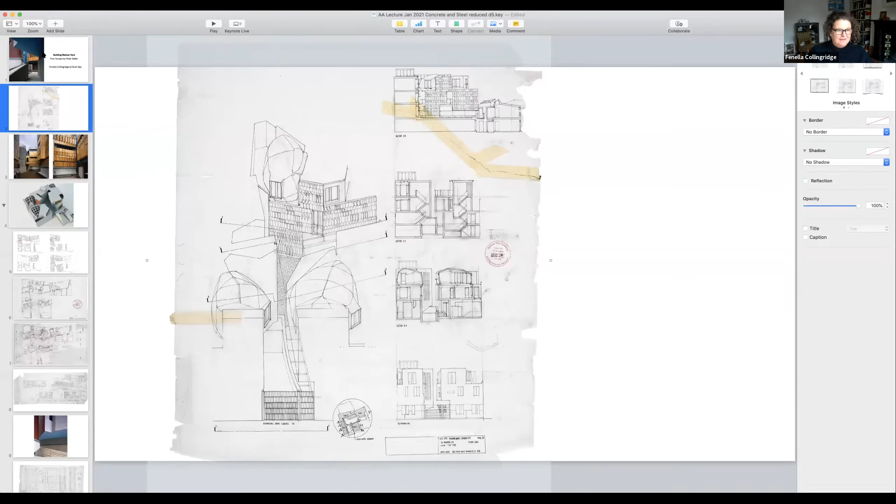As the builders make the building, no matter how deep the thinking that's gone into the drawings, you have to make continuous adjustments to relate the reality of matter back to the original idea - to strip back, tune and refine. This building is a bespoke building, there's a lot of material experimentation, and experimentation always involves risk. It's on a very tight site that gives very little room for error.

And the story we're about to show you is about what really mattered to us, how Peter, Daren and I worked together to realise the project.

It's really nice to be at the AA to talk about Walmer Yard, because I always think of it as an AA project. Peter Salter taught at the AA for years. The client was a student of his in his unit - that's Crispin Kelly - and I was in the year below him studying with Peter.

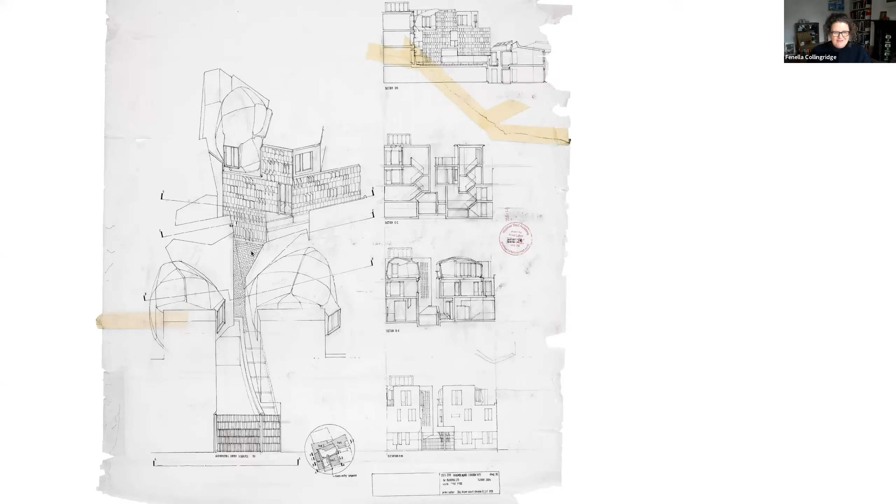It's a space that's about quietness, so the geometries break up the sound, the timber louvers are all adjustable and they give privacy. The grey render is an acoustic tunnel spray that you normally use in tunnels, and that absorbs a lot of sound.

The building's built of two skins of concrete up to the top of the benches, you can see, and then it continues as a single skin of concrete inside the rooms. So I think it's a project about interiority. Even this shared courtyard space, which faces south, is conceived of as a room with these massive benches. And on the ground, you can see end grain oak cobbles.

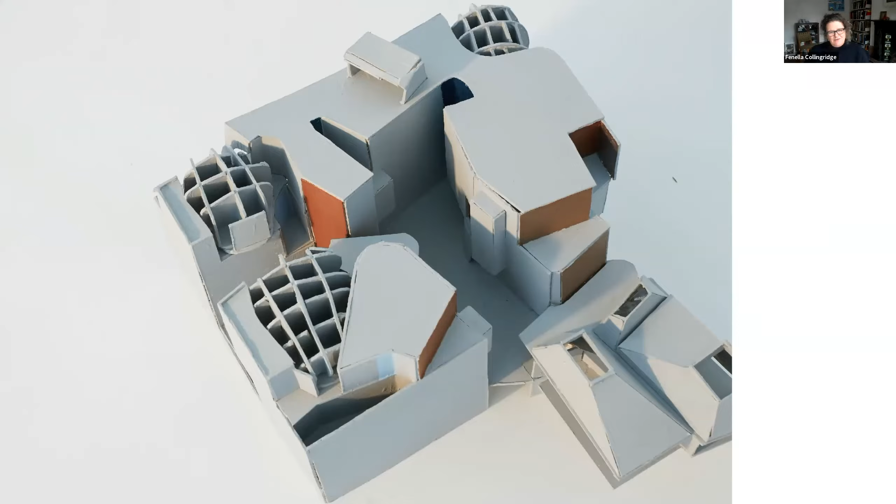So this is a very early model that I worked on with Anthony for the colours, but I'm showing it really so you can see that inner pocket of space, and also how the plan splits and cranks so that every room has more than one aspect of light. This is a full set of plans.

This is the ground floor, lower ground floor and ground floor. There's 4 houses. This is house 1. House 2 comes back to here along this party wall. House 3 runs along the back of the site, and house 4 is what we call the sunken house.

So that's the top floor, and then it's pressed down into the tabletop. And then this is the courtyard here. Car park level below, bedroom level, and the sitting room level.

But as the site's tight and the rooms are actually quite small and intimate, you can see that the circulation is an incredibly important part of the scheme.

There are 2 big cantilevers here and here that almost close the courtyard space off from the street, making it even more private. And these big lozenge staircase drums - I think of them as table legs, really. They're holding up the large transfer slab that's the courtyard.

The geometries look very complex and fluid, but there are very strict rules and patterns to them. Every room has at least one right angle, and around the courtyard, all of the walls are either parallel or perpendicular. It was essential to understand how those rules worked and maintain them not only in the drawings, but also in the project.

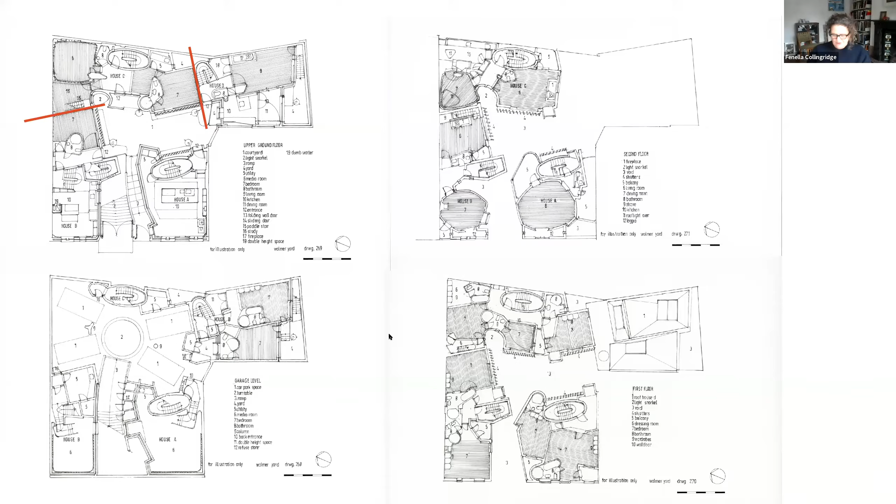This is an earlier hand-drawn plan of the ground floor. I think you can really see the twists.

So every time you enter a room, you walk around one of these steel bathroom pods through the shadow before you come to light. And as you walk up through the elliptical staircases, they give you a wider landing on the turn, so you're constantly being turned away almost before you enter a space. And that extends your feeling - it sort of extends the experience of the size of it somehow. That's a bit clumsily said, but it's true.

The concrete pieces are obviously structural and massive, and they're gentle in their geometry and in their surface treatment. They carry light and shadow. The dark steel bathroom pods are things that you always walk around before coming into a room, so you're constantly turning through shadow before coming back to a muted light.

And the two parts of the scheme we're going to talk about today are the concrete and the bathroom pods. Concrete was essential because of its thermal mass and its acoustic properties, but also because the casting process communicated the fluid geometries of the plan and the section.

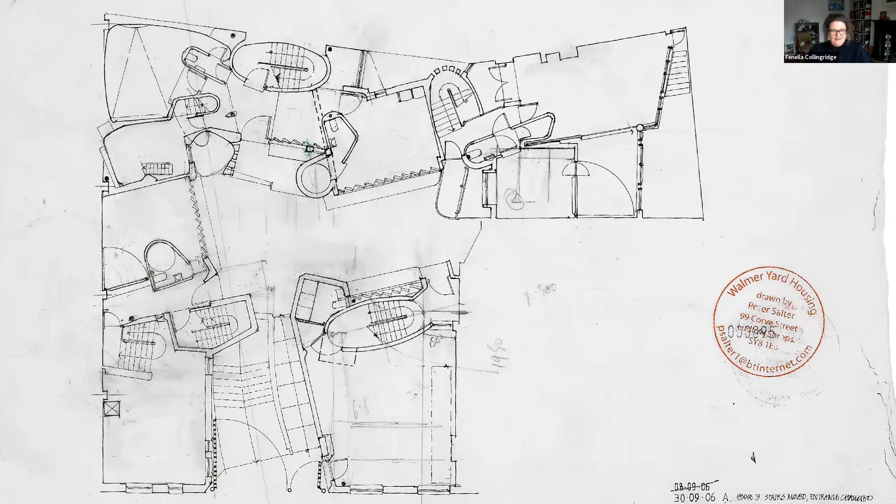I love this drawing because it was one of the first translations from hand drawing into CAD drawings. I think it's interesting how the design intention can so easily be lost or changed as you move from one process to another, from one set of definitions to another - and all the redlining, that's me and Peter correcting all the geometries that somehow got a bit flabby when taken into the CAD drawings.

I think it was hard work doing that in a drawing, but then imagine we had to do that on site as well. So it's that kind of trying to keep control of all of it, and keeping that rigour was a struggle throughout the project for all of us.

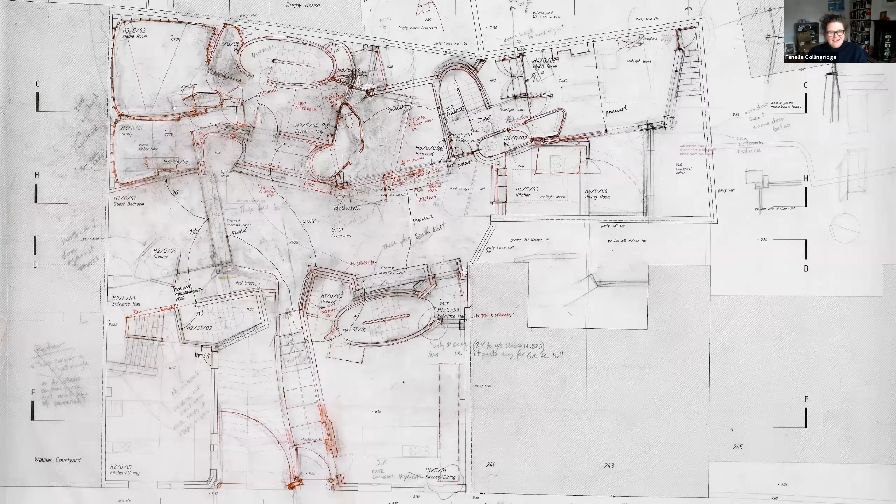The great thing about working with Daren was that from very early on, he really understood what mattered to us and how to translate that into construction. This is a drawing of the ramp, which Daren's going to talk a lot about making the shutters for. Peter knew a lot about concrete because he'd worked on the second arts building in Bath with the Smithsons.

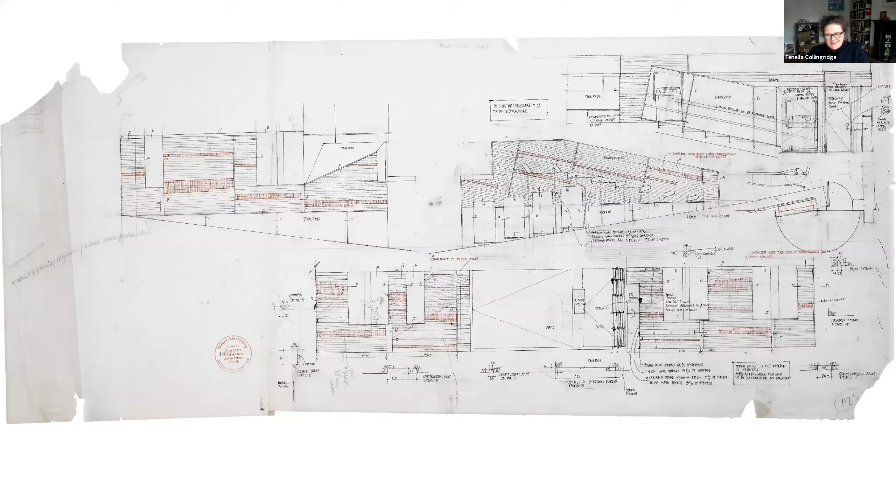So actually we sort of knew quite a lot about what we wanted to achieve. But even here, you can see that all the red patches were areas we were going to scabble. In the end, we just scabbled the pieces that hadn't quite worked - and so scabbling became a technique for us to repair concrete.

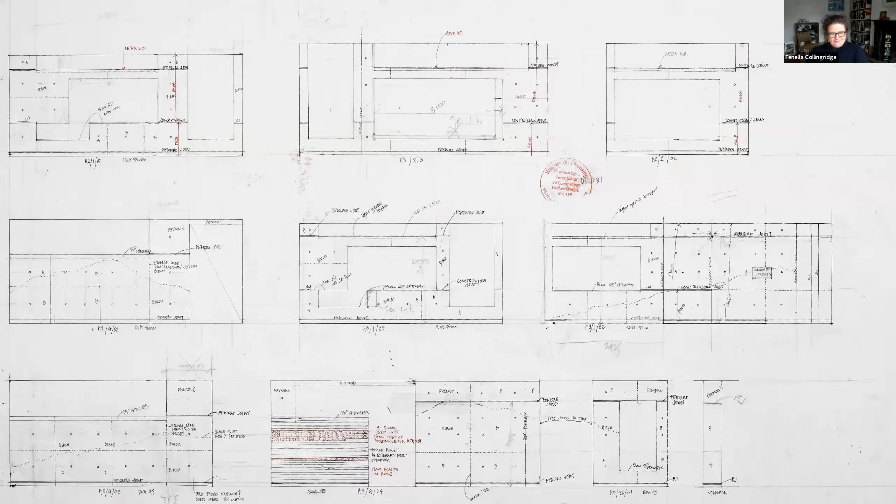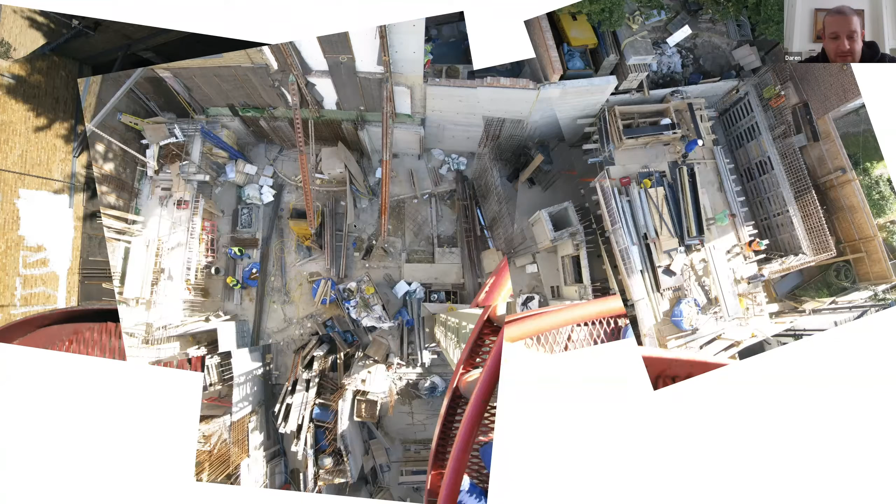Wanted it built. These weekly meetings helped form a great bond and friendship between us, and helped them realise our strengths and us have a good understanding of what they looked to achieve, both practically and aesthetically. I think the best results from these meetings were usually formed after the weekly pub lunch. Fenella was always the voice of reason in these meetings, unless there was a chance of using gold leaf anywhere. So, next slide.

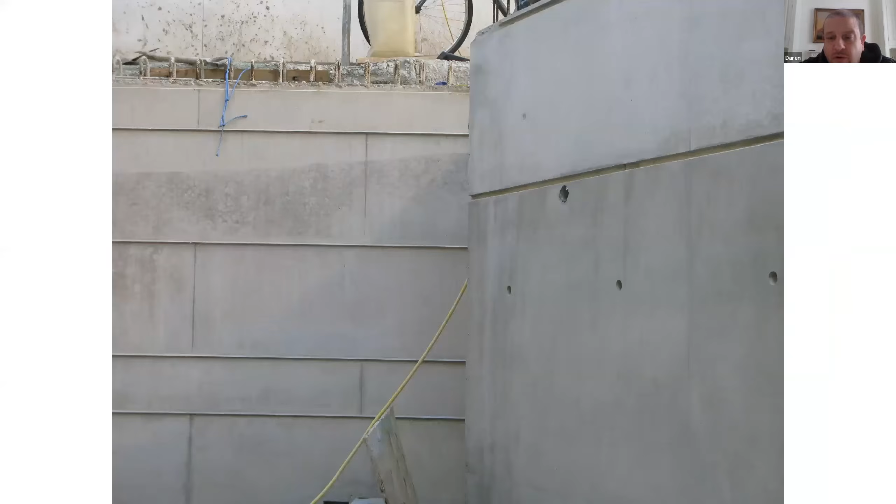During the process of work through the concrete package, it was agreed that we would produce sample panels for all the concrete finishes. Luckily, we had a space in London where we could build a sample room containing all the finishes to be used on site. So we were able to agree on the concrete mix, types of releasing agent, types of timber for the board mark concrete, and the striking times. There were 9 different concrete details to incorporate into the project.

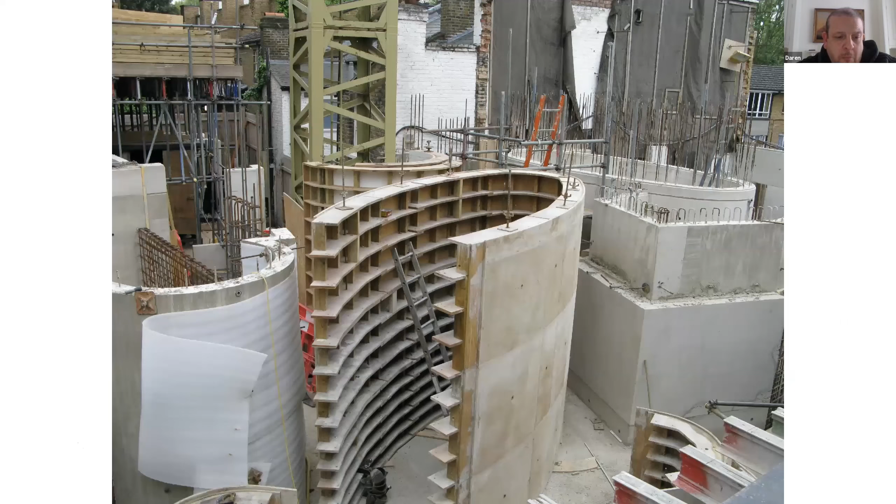This enabled them to be used on all 3 elliptical staircases. The shutters had no face fixings, as we did not want to see any nail or screw marks in any of the concrete, so everything was fixed from the rear. The design was made so that everything could be bolted together and easily stripped down by the site operatives. The shutters lasted nearly to the end of all 3 staircases, and we just had to reskin them for the final pour.

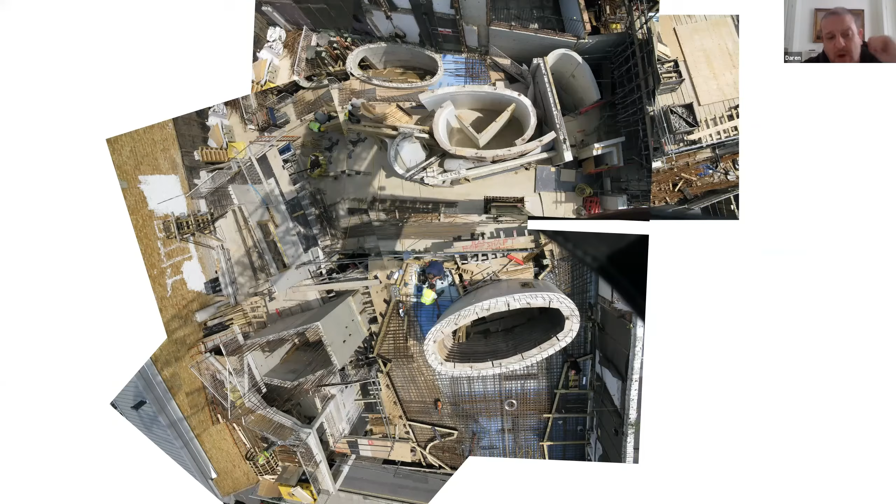As you can see from this photo again, the site had lots of issues, and the main issue was space. We had a crane situated in the centre of the courtyard, which moved the shutters to their required positions. To install in-situ concrete on any site, you realise very quickly that the shutters, push-pulls and braces take up a lot of room. And when the shutters are not in use, they have to be stored on site. It's very clear from this photo taken from the crane exactly how tight the site was for space, especially considering the nature of the works.

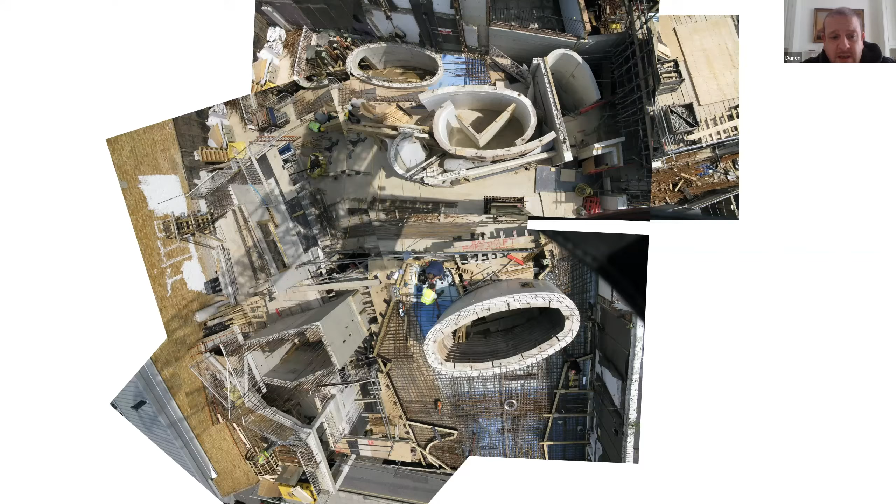The shutters for the staircase, when fully erected, were 4.8 metres high, 7 metres long and 4 metres wide. In lots of concrete projects, you can use the shutter for a pour, strike the shutter, and then move it to the next pour. In this project, we could only do that with the staircase shutters. Everything else had to be individually made for every single pour.

When the concrete lorry arrives on site, everything has to be ready to go, as we only have about an hour to unload each lorry. The concrete is poured from the lorry into either a concrete skip, which is transported to its place by the crane, or a concrete pump, and then poured at a steady pace into the shutter, while the concrete finisher uses a vibrator, removes all the air from the mixture, and pushes the concrete against the face of the shutter.

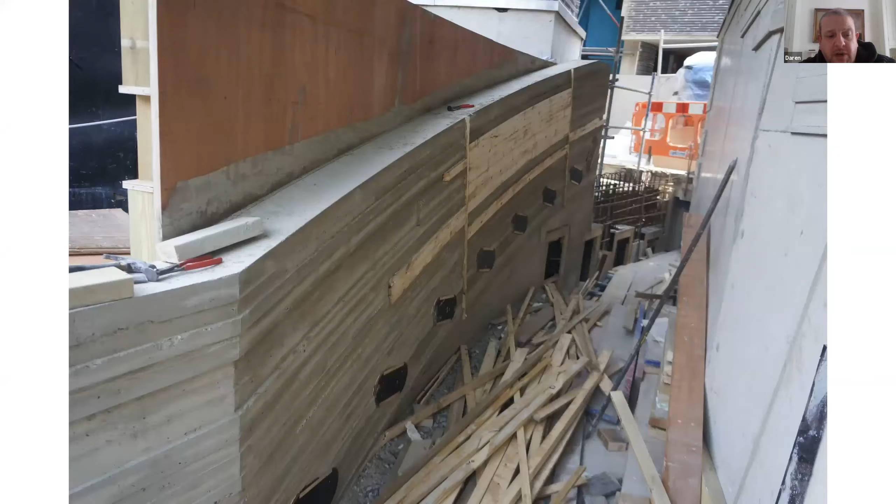This process was completed to the exact method and timing that we had specified, using findings from the test room. The majority of concrete pours on this project were completed using the skip method, as we had used this method on the test room. The concrete was placed and correctly vibrated.

Then we allowed the concrete to cure for a specific period, which was different for each pour. For instance, you see on this photo here, we actually let the board mark timber shrink back itself and fall off, rather than trying to take it off, because that just made too much damage to the shutter.

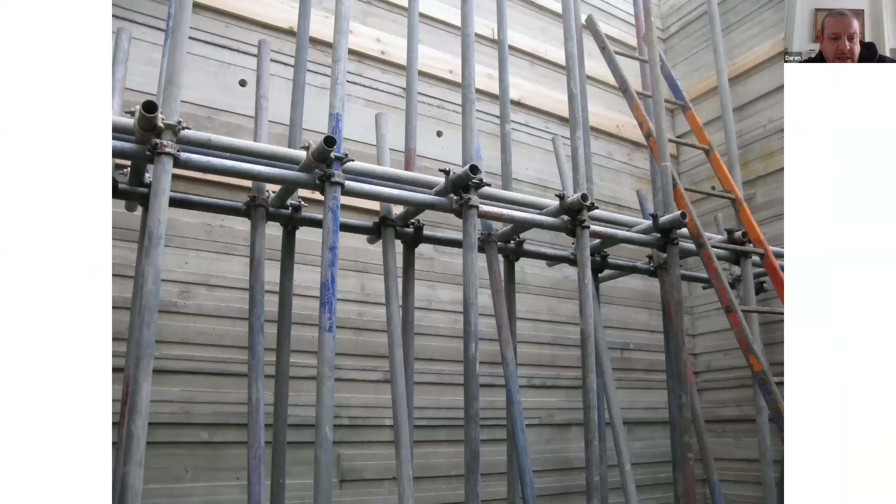After we'd got the concrete into the shutter and we were waiting for the correct time, there was nothing we could do. We had to just wait for the shutter to be removed before we could see if the desired finish had been achieved.

In some instances, the finish was not perfect, and the idea of taking down a concrete wall was very off-putting. So Peter and Fenella came up with a solution to the issues. The main remedy involved scabbling back any areas that had too many holes in the surface. There was no filling or face repairs carried out on this project.

Again, with this site being so tight, while we were waiting for a pour to cure, we were already progressing with the next shutter and pour that linked to the previous one. So in most cases, if the finish of the previous pour was not 100% satisfactory, we would have to move on regardless and deal with the issues in another way. Thankfully, the majority of the concrete work turned out to be of a very high standard.

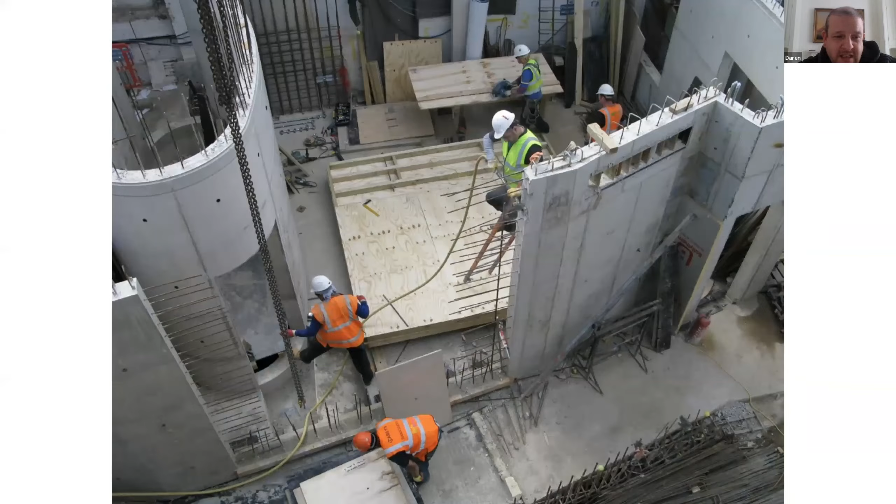This picture shows a shutter that we constructed on site on the floor, which would be lifted from the base and positioned using the crane. In pretty much all circumstances, a kicker would have previously been installed, and this is what the shutter would be pushed against to form a seal.

On a two-sided wall, there would be a shutter on both sides fixed firmly with spacer bars and divvy bars. These are sealed against the shutter using cones, and on this project we specifically made the cones very small. That's what Peter wanted.

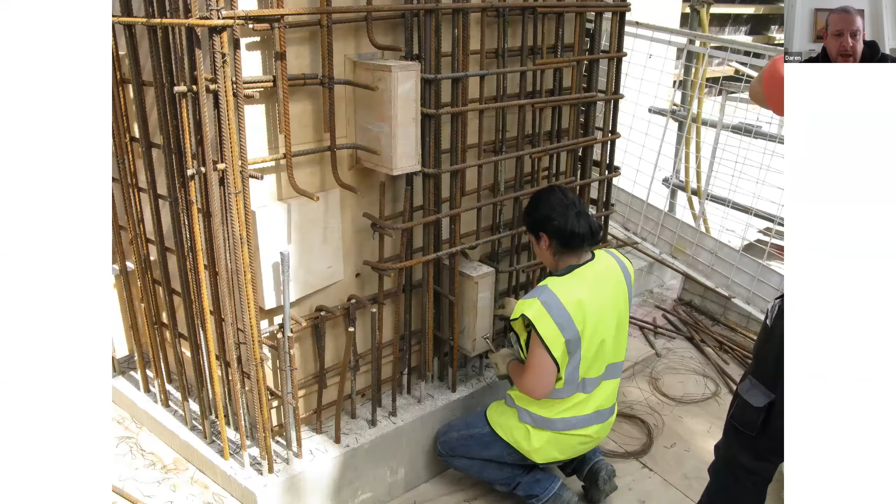This picture shows how much reinforcement there was placed in the staircase of house 2. As you can see, the reinforcement is very restrictive and densely situated. This caused lots of problems for the concrete finisher, and in this instance, we had to use external shutter vibrators as we couldn't get the poker through the reinforcement. There was too much reinforcement in there.

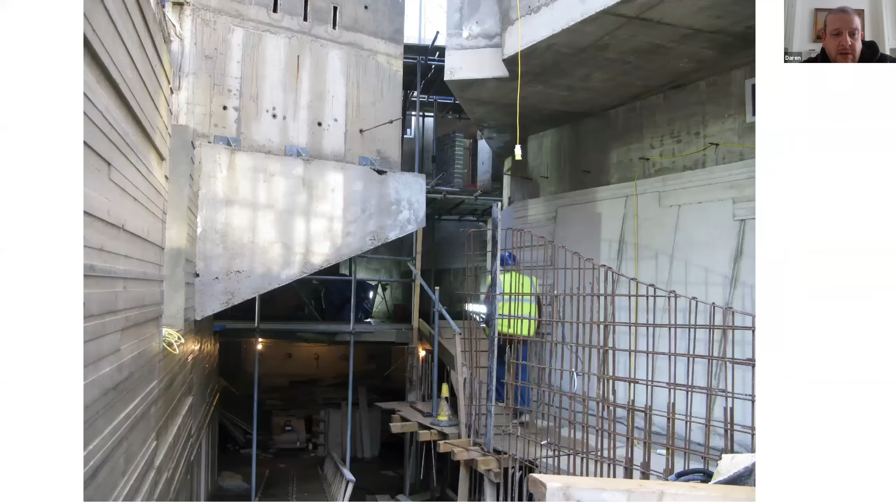The staircase to house 2 had lots of issues, as you can see from this next photo. We had a cantilever with an angled soffit. Everyone was worried about this angled soffit. There was lots of discussions and arguments over this as to how the finish would actually turn out.

In the end, we just agreed that we would get on with it and pour it. However it turned out, it would stay and be remedied on site. And luckily, it turned out very well. There was no real filling or anything to do with that.

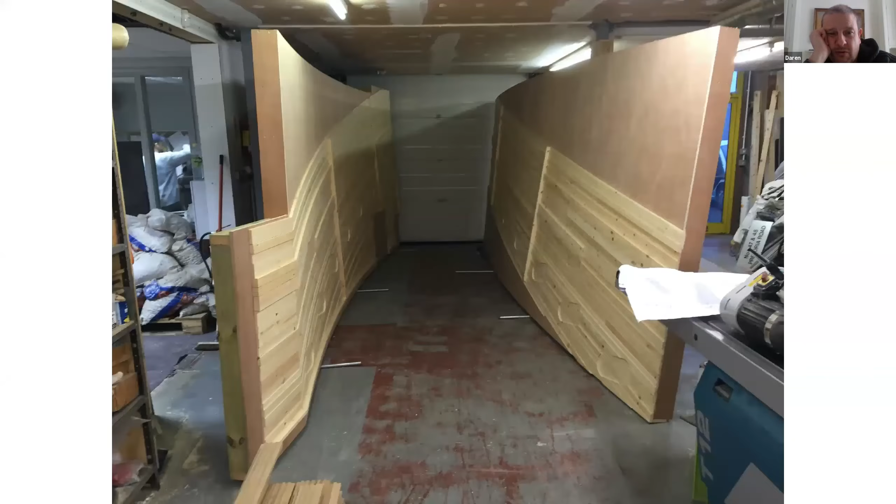The board mark concrete was discussed in great depth for this site. And for each board mark wall, we were given by Hugo a very colourful detail of the exact percentages and thicknesses of boards and where they went.

This was all screwed from behind to a sheet of ply, so no face fixing again. This was so that no screw marks could be seen in the concrete. And this in turn was fixed from behind to the framework of the shutter. This picture shows the shutter in production in the joinery workshop.

Noel, who built these shutters, is actually trained as a joiner and furniture maker. So the shutters, as you can see, are immaculate joinery items, which shows in the concrete.

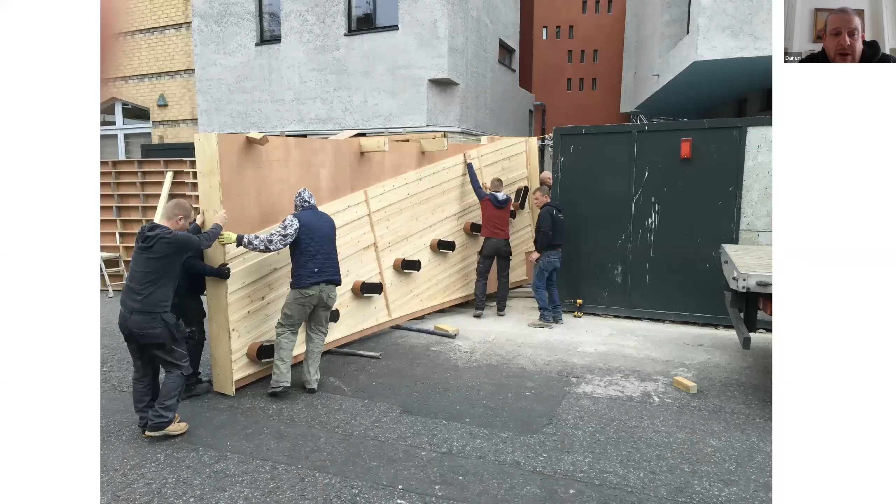This shutter could only be installed when the courtyard was completed and the stairs to the ramp was in situ. As you can see, we had to deliver this by lorry and handball it into site because we couldn't do this until everything was in place. So this was a final pour.

This shutter has always amazed me to this day, how Noel has managed to get the shutter so perfect that the lozenge-shaped lights on either side of the shutter met with millimetre perfection. Both sides of the shutters were curved. They were at different heights and on different planes, one angling down towards the garage and the other angling up the staircase towards the courtyard. Yeah, he took some site dimensions and then brought this to site and it just bolted together perfectly.

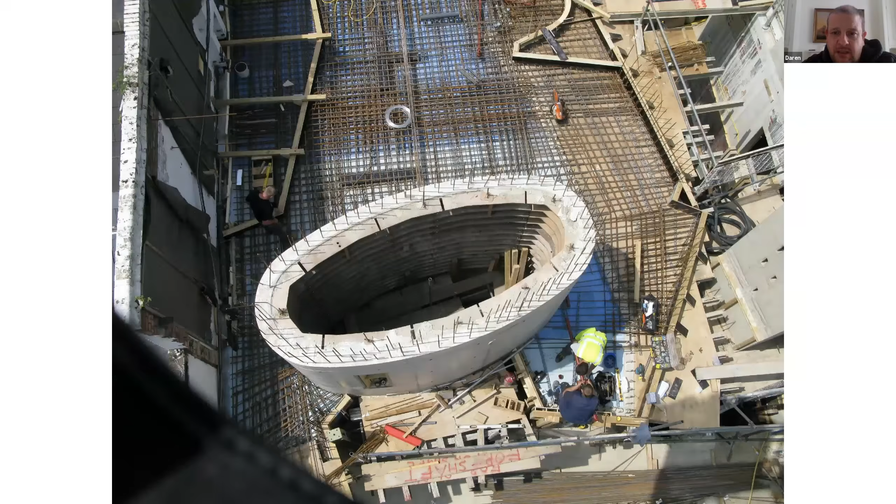This picture shows the stair drum in position and the setting out of the floor that's connected to the stair drum. With the concrete floors, we installed the shuttering underneath and propped this. This was then covered in a vinyl flooring with spacers, then the reinforcement, and then, as you can see, the kickers are all set out onto the floor, ready for construction of walls coming above. So this is very nearly a day or 2 days away from a pour.

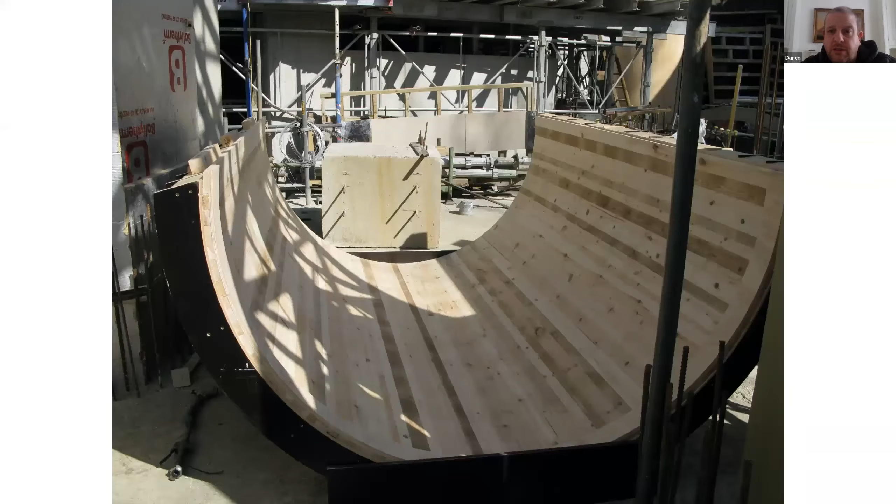The concrete works in general brought up a number of challenges in relation to how to form the shutters and how to successfully pour the concrete. The shutter in this picture shows a section of the light scoop, which was designed on the shape of Peter's arm, manufactured off-site in the joinery shop. The shutter is formed from vertical board sections and curves both horizontally and vertically. Along with this, we had to position window openings and light scoop shapes for the Prism Lights.

This light scoop stems from a crucifix-shaped column in the garage, and this column in turn holds up the ground floor slab, with each floor supported onto the light scoop. This means the light scoop is very densely packed with reinforcement, which created massive issues with how we were going to vibrate it, get the finish, and get the air out.

The scoop had to incorporate the electrics as well, before we poured, so everything was in place before the pour.

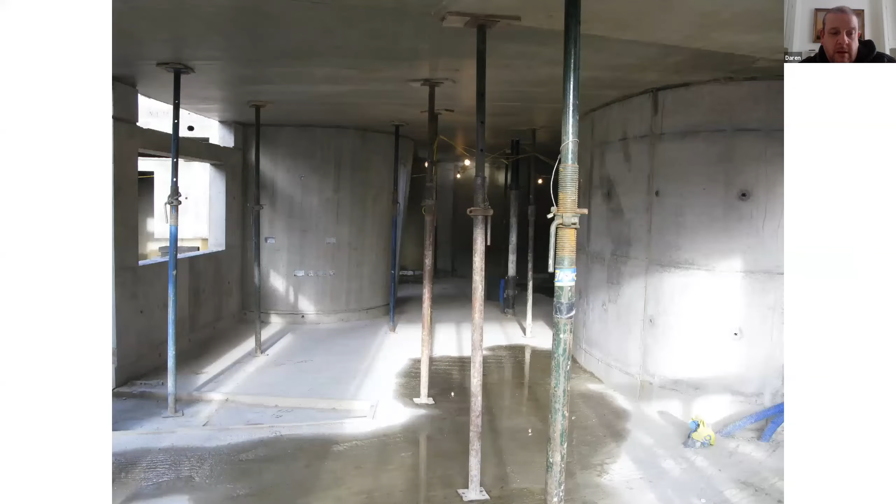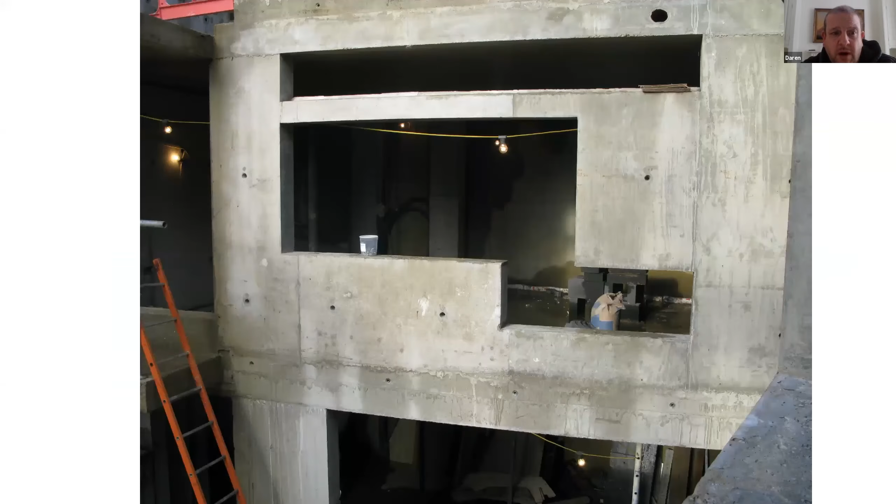This picture shows the courtyard window, the lower section of the windows and the fin section to the top of window, all had to be poured at the same time. The shutter was made for the entire wall, and we had to place 100mm pipes into the top window and into the lower sills as well. That was a method of both getting the concrete to areas where it wouldn't flow or rise, and also for us to vibrate those areas.

The thin sections at the top have actually got a shaped recess built into them as well, just to make it slightly more difficult, and that was to take a stainless steel channel for an LED light at a later date.

Go back two slides, Fenella. This picture is pretty good, it shows all four big issues: the stair drums, the light scoop at the back with the board-marked concrete, the thin window section, and the vinyl ceiling, which was the concrete we cast against the vinyl ceilings. That's it, back to the...

In the other sections of the work, such as the steel pods for the bathroom, we really had to investigate the setting out to save as much space as possible. So the way we decided to do this was we took the drawings and created one-to-one templates on site, or rod drawings. Next slide, Fenella.

We basically narrowed down everything that we could. We made templates of the toilet pans, the shower trays, the basins, and we literally walked around with these in the room, making sure there was enough room everywhere.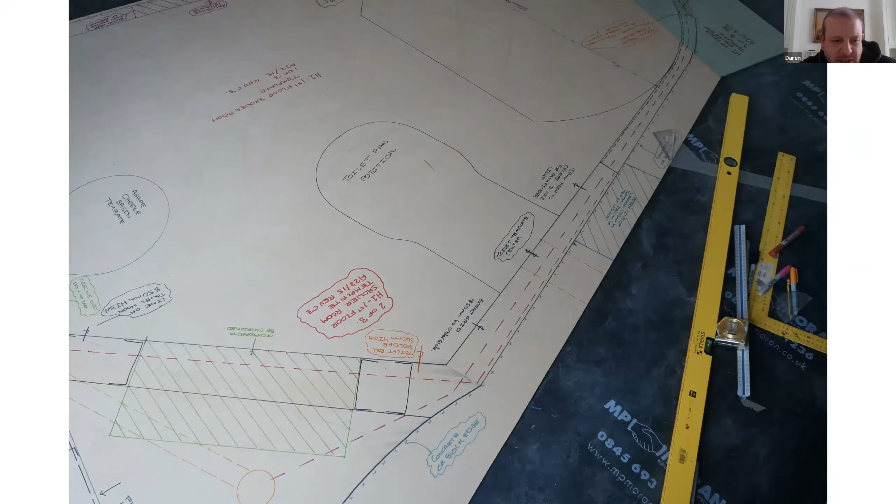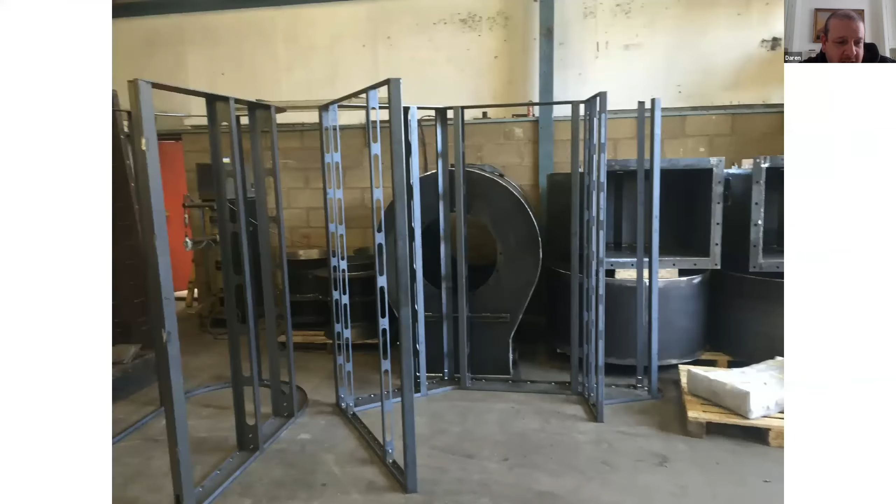We plotted exact pipe runs and exact positions of the sanitary ware items, and then we delivered these templates in whole to the manufacturers. This one shows how the soil pipe comes through, the actual route to the toilet and everything. And then this would translate into the grid that was constructed, and then to the metalwork.

The metalwork company took these and detailed them up in their own programs for their CNC to cut the metal. They brought the grids to site, we fitted these grids up into site, put all the pipe work in, the cables in, and then they came to site and welded on the fabric, the 3mm steel covering throughout.

That was done on site. And then on completion of this, we used a special wax product to protect the steel.

When the steelwork was up and completed, we then set out the tops for the Georgian glass, which we had to measure and template. This is a sketch of Peter's showing exactly how he wanted us to create the fins that go through the joints of the glass, and basically Hugo wants to see the bathroom pod.

So this is what we worked on to do the one-to-one details. That's about it. The project was completed by quite a small team, but because of the Wednesday meetings, it was a good and enjoyable line of communication, and everything pretty much got solved with the use of Peter's sketchbook. We managed to get around every issue on site. That's it for me, Fenella.

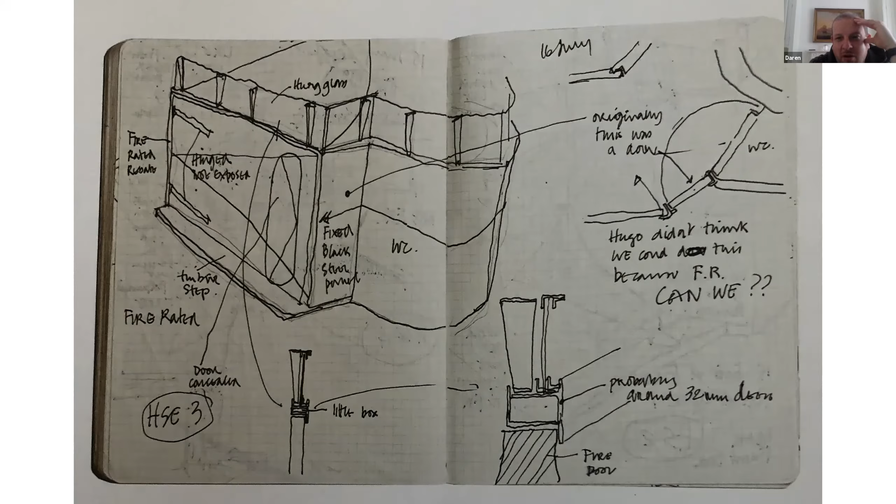Is that for me, is it? Both, yeah, both of you. Both. Yeah, for me, it was Peter's drawings in general. Maybe not the sketches, but the drawings in general are works of art, and you can really get a lot from them.

With CAD, for me, is perfect for exact details, setting out and stuff like that. But if you want to get some kind of a feel into the work, Peter's drawings described it better to me.

I could understand them better. After working with him for quite a while, I really did understand - I think he backed me up on this - that I could produce what he wanted from his drawings. I don't really know whether I could have got the same from CAD.

There was an example of a handrail in House 2 that we just sort of drew on the wall, and then we bent metal pieces to that handrail, and it looks amazing now. It's got coat hooks coming off of it, and the handrail blends in. I think that could have only been done there and then on site, discussing it and moving the metal around while we were doing it. I think that was the only way.

I can't see that I could have got that from CAD. That handrail he's talking about, I think we had to template part of it, and templating is not as easy as you think. The bit that goes up the stairs, I was left thinking, I can do this, I've just got to draw it 1-to-1 and then they'll cut it. It was actually quite hard work making a 1-to-1 template. I think that was quite a few Wednesdays just on that handrail.

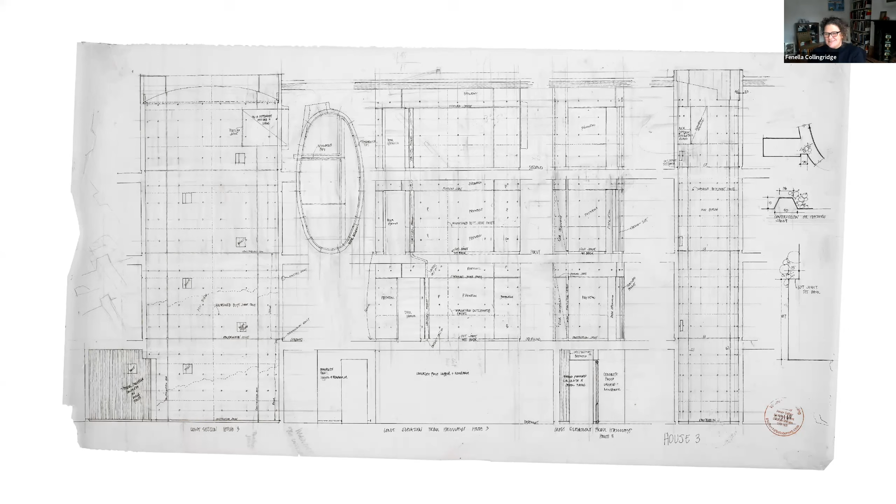It was pretty good, to be fair, pretty good all the way through. I think the thing is, we all already knew each other, so - because Crispin had been taught by Peter, he knew what he was letting himself in for.